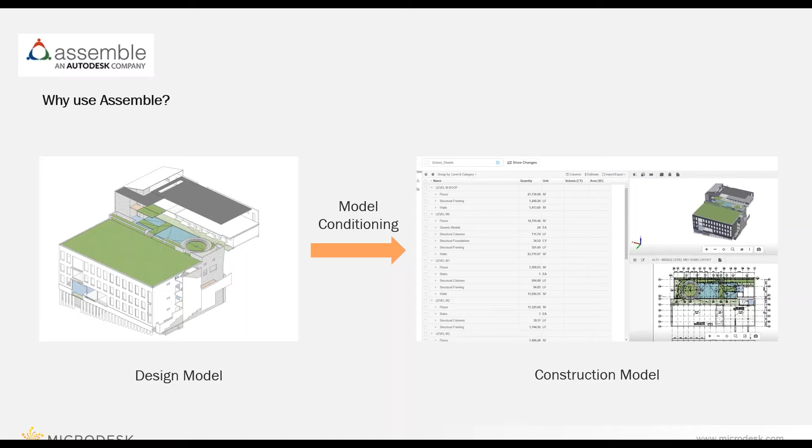Getting to the model on the right usually takes a lot of time and money because design models typically lack that construction-ready data. So out of frustration or distrust, pre-construction teams typically revert back to that traditional method. But unfortunately, those traditional methods can't always keep up with the demands of modern construction. So we must get a mechanism in place to get that design model ready for construction quickly and efficiently, which is what Assemble allows you to do.

Assemble's user interface is fairly simple and pretty intuitive, making it easy for non-BIM users. First, taking a look at this user interface, you have the model tree. This is the navigation tree of all models, categories, families, and types in the project. Then you have the inventory list, which is the schedule of all visible objects in the view. And here is your model viewer, where you can view and navigate the model geometry.

Next, you have the view chooser. You can choose from the drop-down of any of the views that have been saved, or click on the squares icon to get back to the project inventory. Then you have the Show Changes button. This allows you to see changes between model versions with just one click, so you can quickly see what those revisions were between each design iteration.

Next, you have the Selection bar. This allows you to change the visibility of objects, launch the Properties panel, or review quantities. And then there's the Properties panel, which shows you all the properties associated with the item selected in the model viewer.

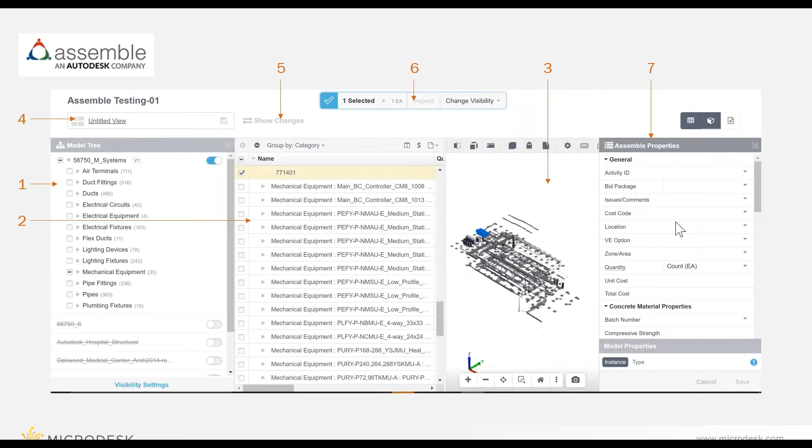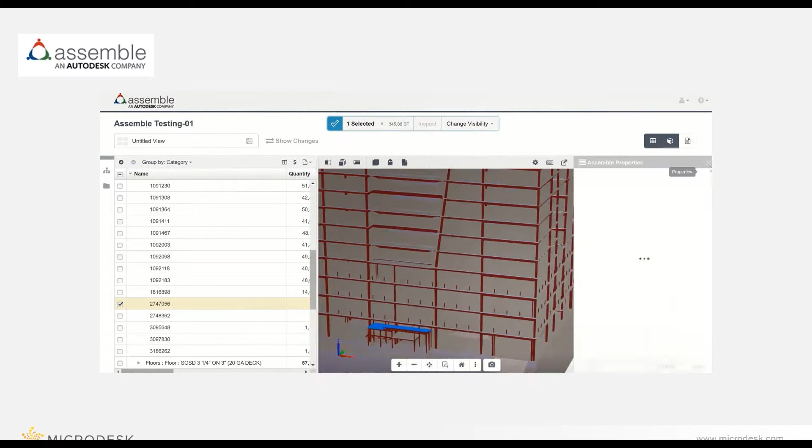So let's jump into Assemble and see how properties can be used to condition the design model. First, we're in the model viewer. We can navigate to an element we want to select, so we'll select the slab on metal deck here. You can see it's selected in the inventory list. We can jump into the properties panel and see all the properties associated with it.

So here you're seeing the Assemble properties — bid package, cost code, right? These can be changed to anything you're trying to track. So we have some install properties in here, and some concrete estimating properties for concrete waste factor, rebar cost, and rebar weight. You can also add custom formulas using the class editor that can be linked to Assemble. It's quick and easy to add information — for the bid package, we're adding concrete and clicking save. That will now be linked to that element from here on out.

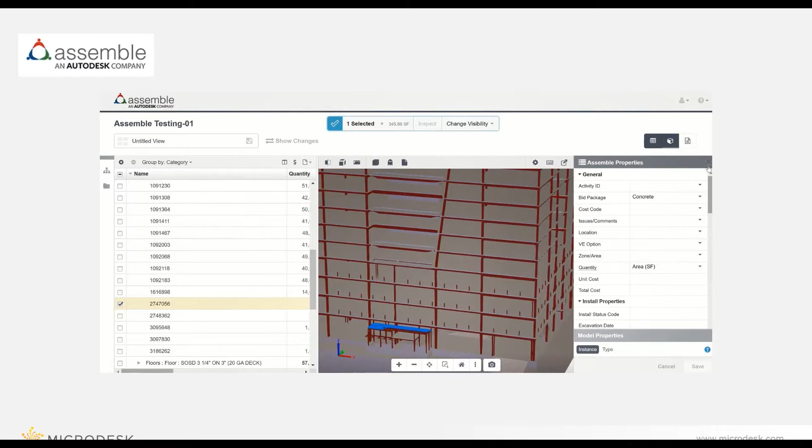Now let's take a look at what it's like to add some custom properties. You go back out into the project inventory, go into Edit Project, and then down to Manage Assemble Properties. In here, we'll see the properties available to us right now — we have general and install properties, and some asset management properties that we have hidden. You can edit, hide, or delete properties in here.

You can also create your own group — so here, we're going to do concrete properties. You have the option of displaying that group for specific categories. If you drill down, you have options like curtain wall, air terminals, ducts — any of the properties associated in your model. But for here, we'll use all categories and click Save.

We want to drag that concrete properties group up because we want it higher on the list when we get into the properties panel. So all you have to do is drag it to the top here. We want it right underneath general. Next, we want those concrete estimating properties up at the next level, so we'll drag those up as well.

You have two options to add properties: either the plus button or create property. We use plus. If you notice, your group is already populated when you use that plus underneath concrete properties. We're creating a property called concrete strength, and then you have to choose your type. You have all these options here: data tree, date and time, area and count, voltage—anything you could think of, you could make the type. For this one, we'll use number. We'll click Save.

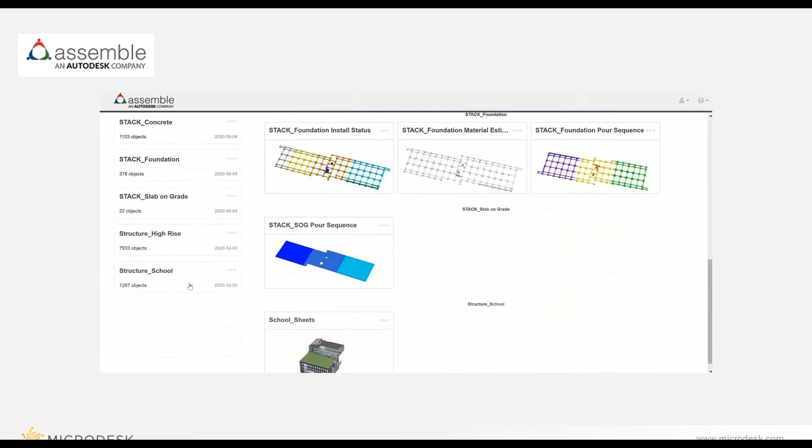Now note, you can add as many properties as you want. You can add as many groups. So whatever you're trying to track in Assemble, whether it be pre-construction or construction, you can add it.

So we'll go back to that same element. We'll go into the properties panel, and we'll add some of the information. So you can see we have that concrete strength and that MasterFormat. We'll jump into the MasterFormat so you can see what it's like to choose from the data tree. As you can see, we have those same levels that we saw on the properties panel.

And you can choose any one of these. We will end up choosing concrete since that's what this falls underneath—that's a slab on metal deck. But again, this can be changed to be whatever your company is using.

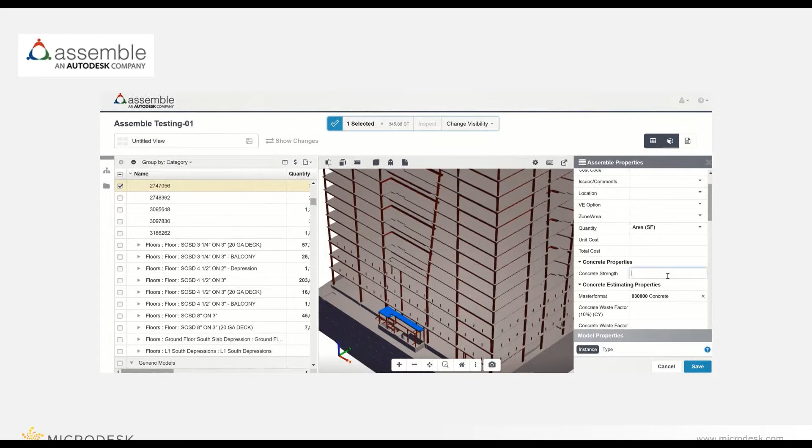Next, we'll add concrete strength. We'll be putting it in as PSI. Note that we did not specify what unit it is, so we'll go back and edit that property just so you can see what it's like to edit it once you already have it established.

So we'll go back to the project inventory, go into Edit Project, go back to Manage Assemble Properties, and we'll click Edit, and we'll add PSI. Note, you're unable to change the type once you create that property. We'll click Close, and now our properties have been added.

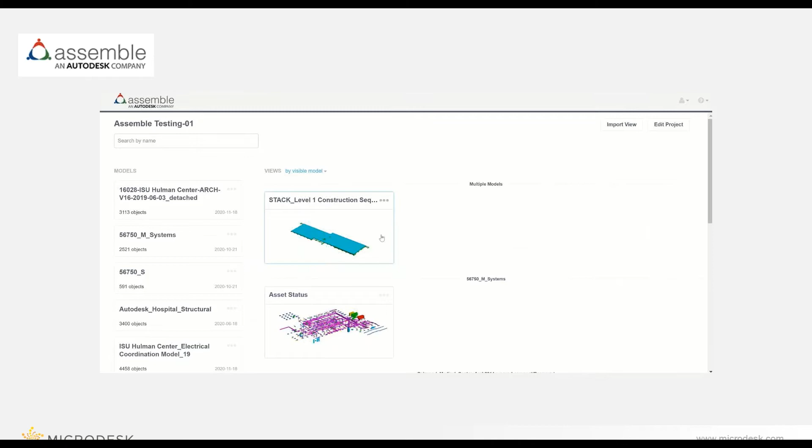Next, we're going to take a look at the inventory list and see how visibility settings can be used to isolate the scope you're trying to quantify.

So we're now in the model. You can see that this is the structure model. We want to isolate the concrete. Right now, we're seeing all the steel and all the other structural elements. So we'll go into the model tree and visibility settings and create a rule.

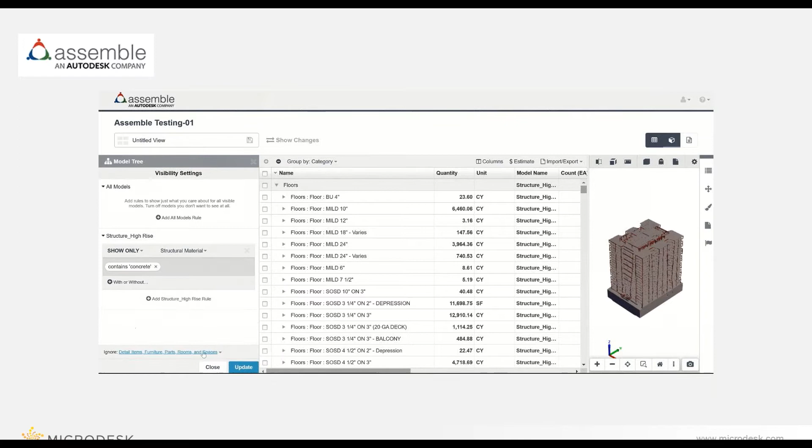We're going to add a rule here. We're going to do a show only. Here you can use whatever property you want to filter by, so we're going to use structural material, and we're going to do a contains concrete rule. And click Update. Now the model viewer only shows the concrete that's on the job, and also the inventory list. So now we have isolated all the concrete on the job.

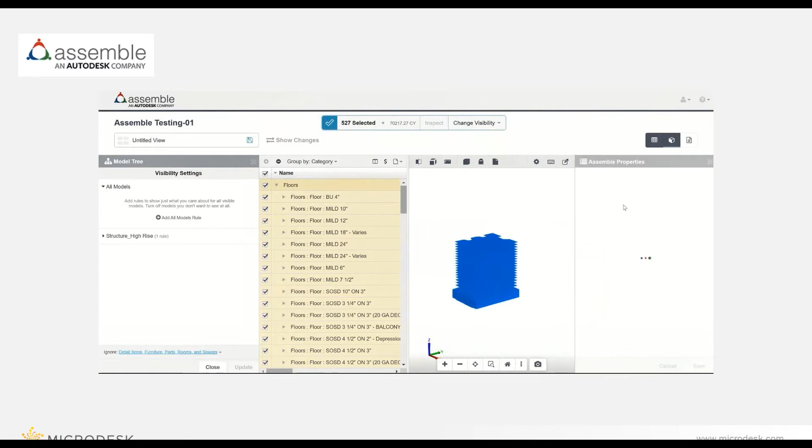Next, we're going to add the bid package here, just so you can see what it's like to add the property to all of these. Since we know this is all concrete, we'll change it to concrete and click Save. Now these all fall underneath the same bid package.

Next, we'll take a look at the inventory list and what it's grouped by. Right now it's grouped by category. So if we drill down, you can see we have all the floors, columns, foundation, framing, right? We have all these other group-bys saved.

So let's just choose, and you can also create new groups. We're going to choose structural material just to make sure our rule is working the way we want it to, and it is. We're seeing concrete buildup, cast in place, some of the balconies, grade 50 for the rebar.

So we're going to create a new group. We're going to do it by concrete strength. You can group by any property available to you in the model, whether it's an Assemble property or a model property.

So we're going to search for concrete strength. Next level, we're going to do category name. Next one, we'll do category type. You can use as many levels to the group by as you want, and then manipulate how they're seen in those groups easily as well. You can see we have a ton of options here. You can drag it up, so type would be above category name, but I like it the way it was.

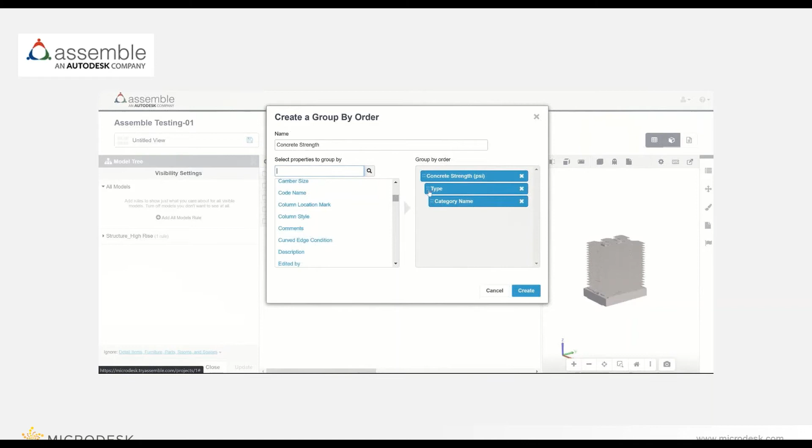So we'll hit create, and then immediately we see the inventory list is changed, grouped by the properties you just selected. So you're seeing the concrete strength, then the category, and then the type. We drill down one more, you can see the families underneath the types. You drill down one more, you can see the source IDs. This allows you to basically group by whatever information you want to see and how you want to see it.

Next, you'll notice we have a ton of information in this inventory list. In the columns, you can manipulate these as well to be exactly what you want. Right now, we have all the model geometry that came straight out of Revit or the authoring software, but we want to add some of the estimating information.

So we're going to pull in unit cost. Note you can pull in any property you want here. We're going to take out some of this information we're not really going to use, so length, width, height, thickness. We are going to use volume and area, and we'll do total cost as well and bring that up.

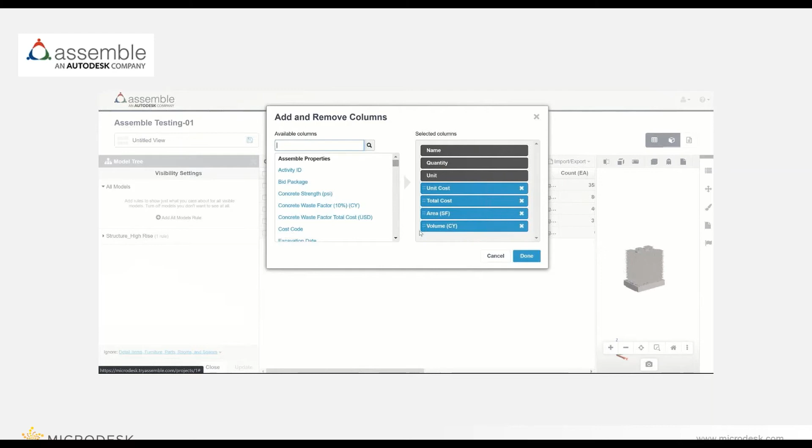Note we already have all the quantities in volume and cubic yardage, and you'll see that in the inventory list. So volume at the end really is unnecessary because it's kind of a duplicate column in this situation, so we're going to take it out.

Done. Now you can see when we drill down, we've got the unit cost for each type and it's calculated, and then you have the total cost, all based off your Revit-based model quantity takeoff. And this is just done immediately.

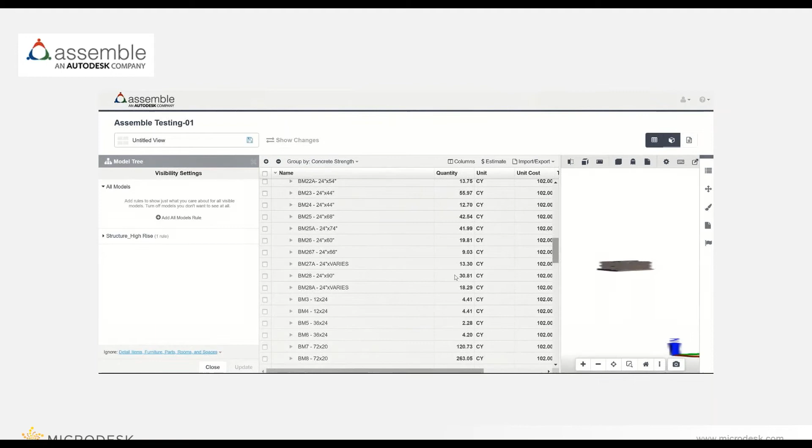As you can see, this can be a huge time saver for your estimators. The process is typically trying to do an on-screen takeoff from 2D drawings, right? We didn't even need to do that. We had the Revit-based quantity takeoff from the model, and now we have the unit cost calculating the total cost for us immediately.

Next, we can come over and color by property. This is a good gut check to make sure that everything makes sense and the quality of your model is correct. You can color by any property. Here we're going to do concrete strength. As you can see, we have all our concrete strengths, and now just immediately put color per the concrete strength.

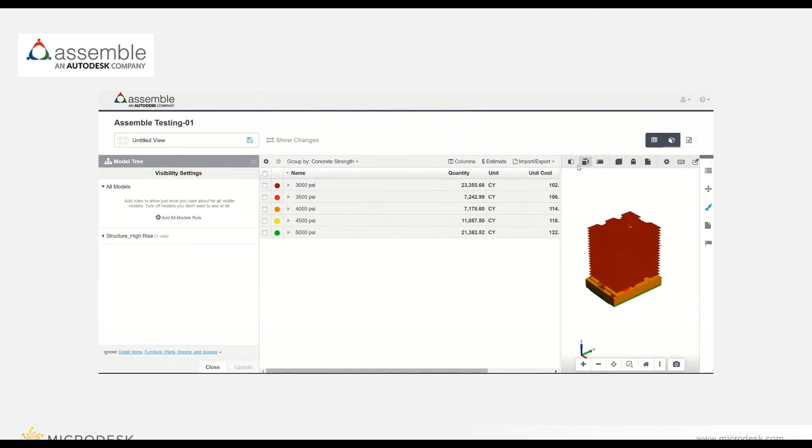You can section to investigate a little bit further. You could also use more rules if you wanted to see this by specific level. You have endless possibilities here. And you can see that in the inventory list, the color is also associated with the colors that you're seeing in the model viewer.

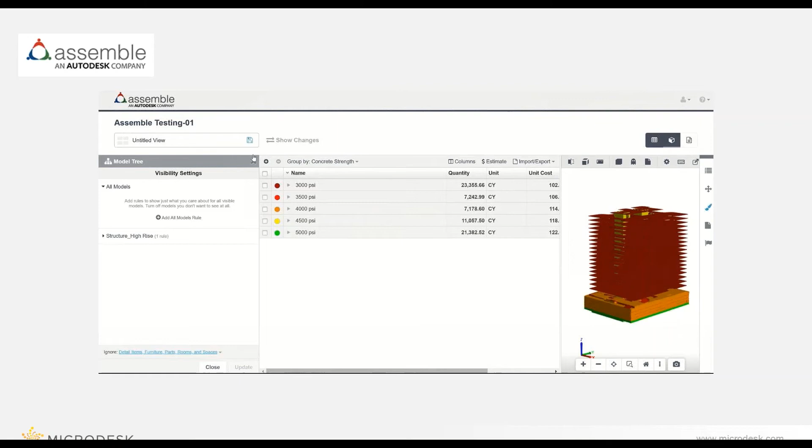Now that we have this view to a point that we like, we're going to save it and do this concrete takeoff. Done. Now we can go back to this view whenever we want to. Your other teammates can jump into it. And now we have a concrete takeoff with all the concrete elements isolated.

Now we'll take a further look into how Assemble can be used to estimate costs by leveraging the Revit-based model quantity takeoff. So now we'll jump back into that view that we just created, concrete takeoff.

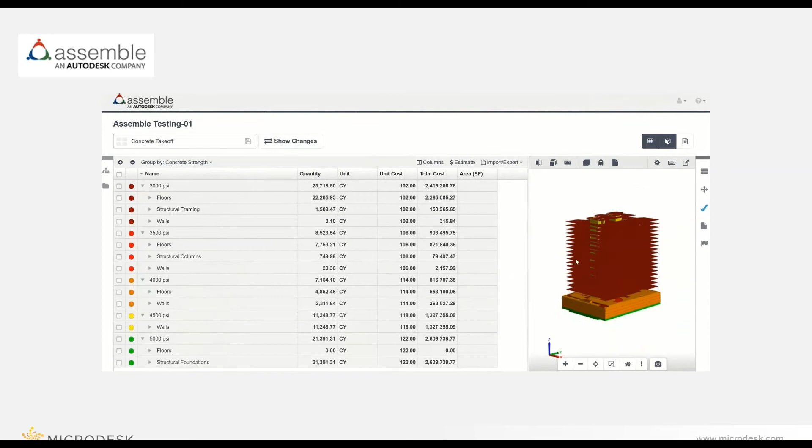Here we'll see that all the color has been saved, the columns have been saved. You've got all the group by saved, right? So this is exactly how we left it.

I want to show you how you can add some information and how that will impact your inventory list. For example, if we knew that this concrete 6-inch wall needed to be changed to a different concrete strength and had a different unit cost, you come into the properties panel. You can change what concrete strength it is. So it's now 3,500 PSI, and the unit cost will change since the concrete strength has changed. We're going to change that to 106.

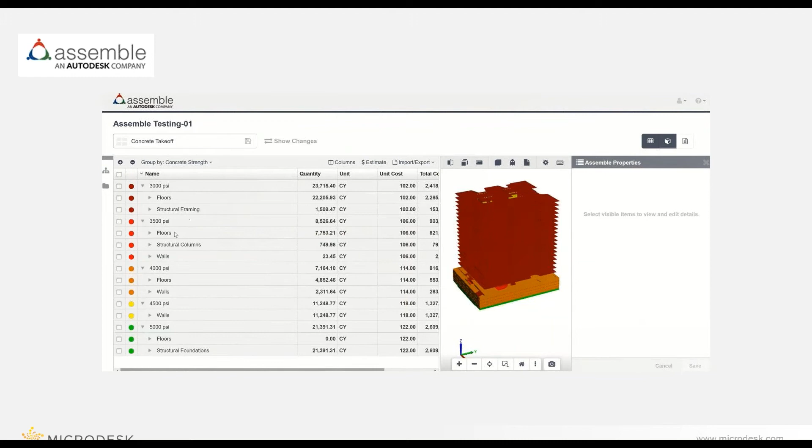As you notice, total cost automatically updates based on the unit cost, and then it's been moved in your inventory list to be grouped underneath the 3,500 PSI. You can also note that the color has changed in the model viewer to reflect that change as well.

Now we're going to use the Show Changes button. This is pretty powerful so we can see the changes between each design iteration. We don't have to go through and hope that the design team clouded everything that they had changed. We can see what's been added, removed, what quantities have been changed, what type and quantities have changed.

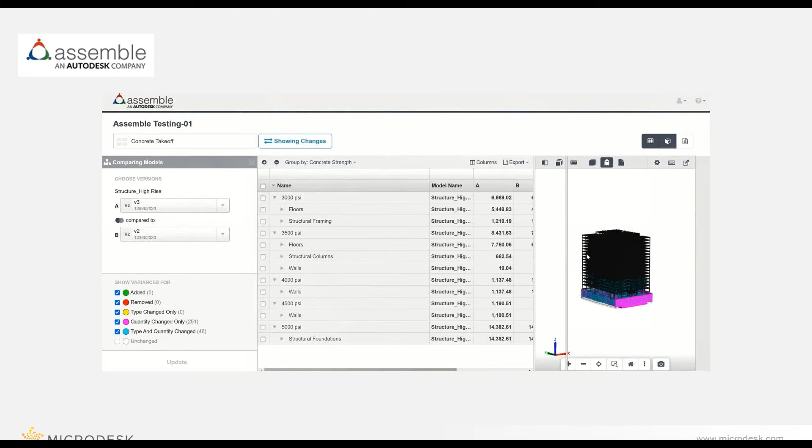As you can see, it's completely isolated in the model viewer to just show what has changed. If we want to show some context, we can use the ghost mode so you can see it where it is in the model, right? And then what's even better is that once you get into your inventory list, you can see what quantities have been added, what has been decreased, so you can see how that impacts your cost.

So we're going to add total cost into the columns that we want to see in this variance report. Click done. And you can see we have model A and B reflect the model versions that are shown in the comparing models window to the left.

And now if we drill over, you can see how these changes impact your cost, right? So we went from having 4.5 inches of concrete on 3 inches of deck to 5.5 inches of concrete on 3 inches of deck. What does that do to our cost, right? Well, it decreased one value by 481,000, but we went up to 545,000. So you can see immediately how that's going to impact your budget.

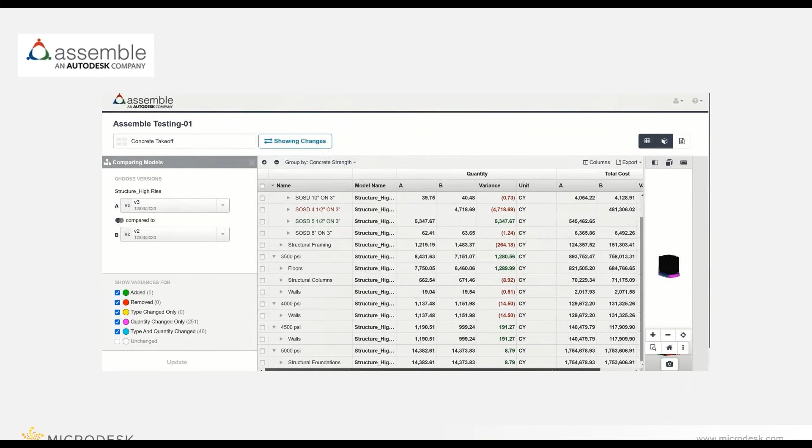You have the information to have educated conversations with your design team and owners as soon as you get that model from your design team. This is typically a pretty tedious process, as you'd have to go through the takeoff again if you were doing it with 2D drawings, and you wouldn't be able to get that information as quickly or easily to have quick conversations with all the stakeholders involved and how it impacts them.

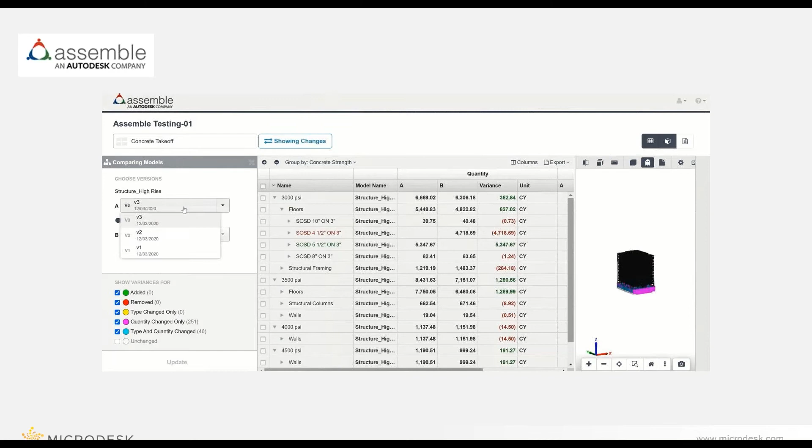Next, you have the option to change what model version you want to look at and what you want to compare it to. So if you had a 50% production to your construction documents, or if you wanted to compare CDs to SDs, right, here, as many versions as you have, you can compare them.

You can also isolate and hide by quantity changed only or type and quantity changed only, right, what's been added or removed. So it really allows you to isolate that information.

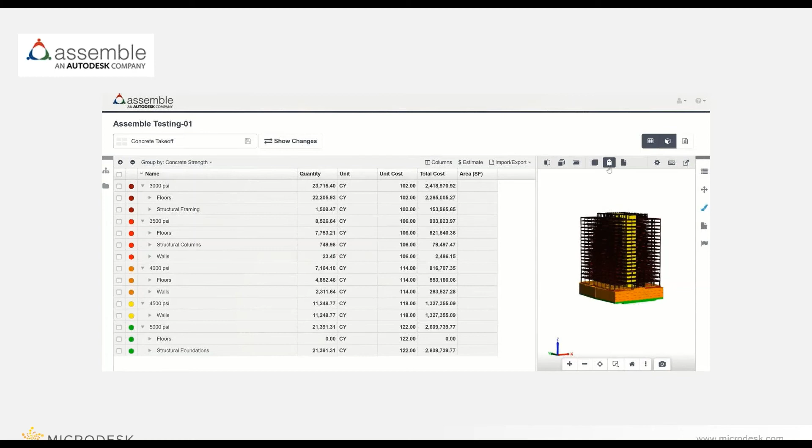So we'll go back to just the regular view that we had, and you can see we have all the information set up the way we want it. So you can export to Excel now that you have all the data set up the way your pre-construction team wants to assess it.

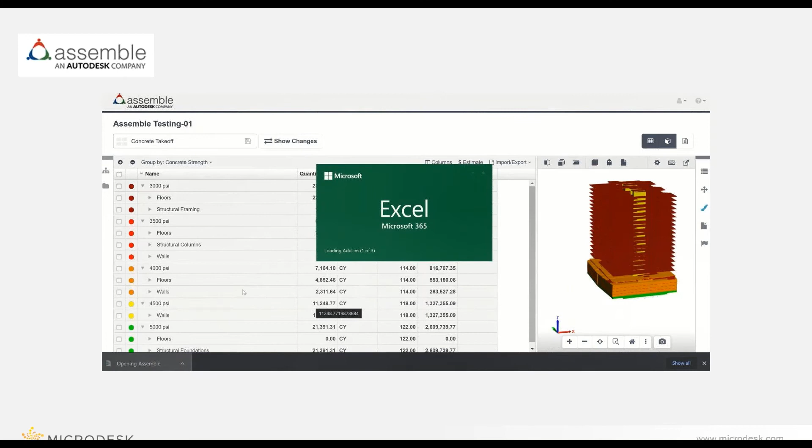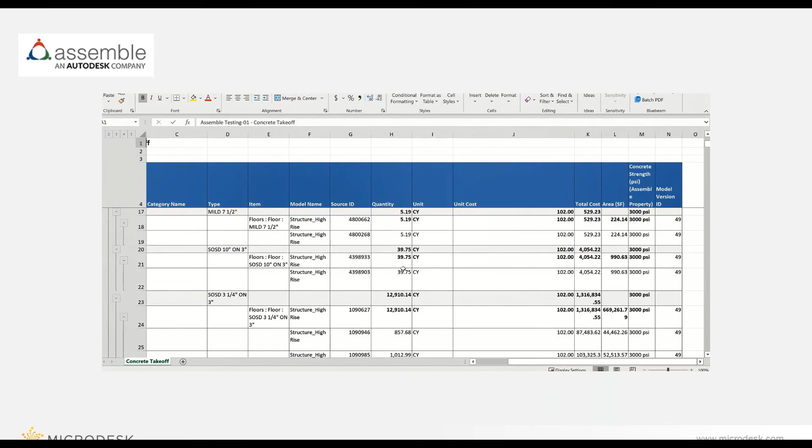So now you can open up Excel, you can see the workbook here. And you're able to see that this is set up the same way that Assemble had it set up, right? All the same information, unit cost, total cost, but this information's stagnant, right? Which is fine, it just captures the picture in time.

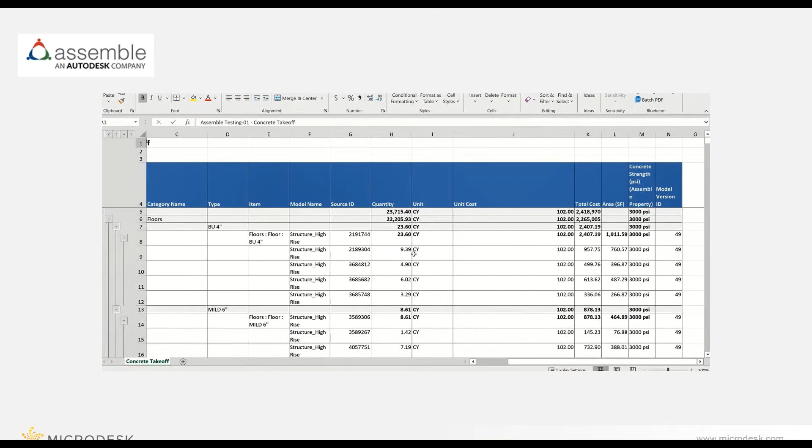And although that's great right now, we all know that there are design changes that happen all the time. Or if we were to add different properties to Assemble and they were to change the unit cost or the concrete strength or any of the other properties that you are pulling and exporting to the Excel spreadsheet. So although this is helpful, there's an Excel and Assemble integration that allows you to basically connect those two platforms and have a live connection.

So we're going to take a look at that next.

So now we're in Excel. There's an Assemble add-in that you can download. You need to locate the connection and then configure it. So you connect to your site, pick the project, and either pick a view or model. Here we're going to pick a view, click that concrete takeoff view, and click your version. This is a view, it's NA.

Now that you've configured your connection, you need to set your headers. So here's your report headers. Now we're going to do some configuring of the column mapping. Your first column you choose, you really need to make it your key. This is going to be how we pull the rest of the information. Use the assemble connection, and we're going to use source ID. We're going to do apply and save.

The same process, except we're going to use the data connection for the column key. Here we're going to do structural material. We'll drill down and find structural material. Note, this seems a little tedious, but once this Excel spreadsheet is set up once, it does not have to be done again. All you have to do is run the report and you get the live information straight into your Excel spreadsheet.

You can pull whatever data you want and whatever category you want, property as well. So here we're going to map category name, apply column mapping, and save. Next, we're going to do type. Drill down to type and map that column.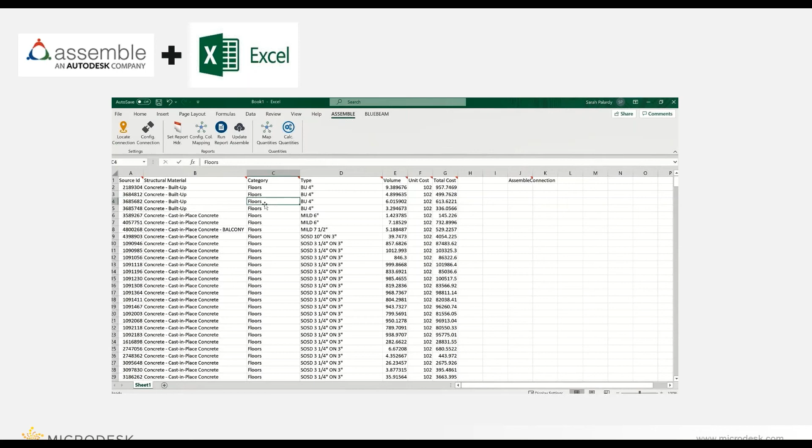So here is how you would basically pull columns and map those columns. But sometimes your teams are going to have pre-established spreadsheets and workbooks that they are already using for their estimates, and they're going to want to be able to just pull the quantities that you're creating in Assemble. So there's another tool within the Assemble tab called Map Quantities, and we'll take a look at that next.

So here we're going to show, we have a spreadsheet that I created. This could basically be any spreadsheet that you have with your team. If your pre-construction team has a workbook with 50 sheets, all you have to do is make sure that you have the Assemble connection in one of the sheets. So same process as before, you're going to locate the connection and configure it. We're going to connect, pick the project, view or model, and what version, then click OK.

Next, we'll see that we're looking strictly at the slab on metal decks, and we're going to try to map some of these quantities. These quantities have already been mapped just for time-saving purposes, but here we'll do quantity, picking the quantity property you're looking for. Here we're looking for volume. Next, you're going to do the filter by property. We're going to pick type, so we can drill down into the type we want. We're picking the slab on metal deck that matches what we're looking for, then clicking OK and save.

And here we'll do calc quantities, and now these quantities for the volume for all of these slab on metal decks have been pulled straight out of Assemble, so it did not need to be done in a 2D setting. This is now in the workbook that you had already created and established. And note, you might have unit costs that you didn't want to put in by hand that you already have in your Excel spreadsheet.

So this is where we're going to show how you can push things back into Assemble. We're going back to configuring column mapping. We're going to use type as the column key, column type. We'll do that Assemble connection as type. Then apply and save.

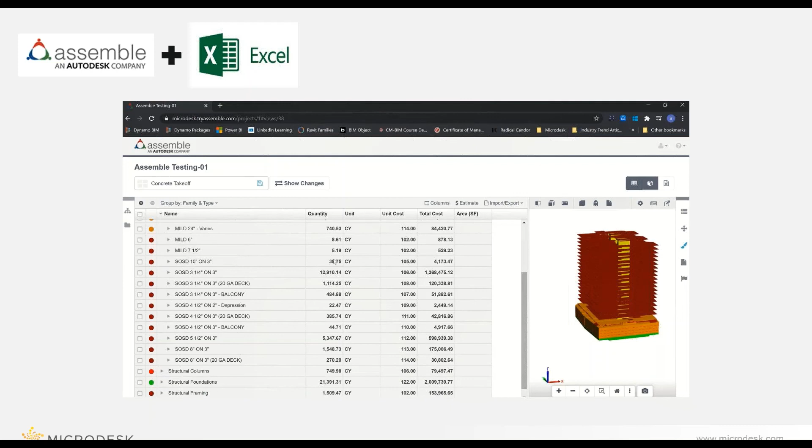So to go over some benefits of using Assemble, just to wrap this all into a big bow here—the key things I think are most important are, first, the collaboration across the entire project team in a cloud-based environment. This is huge.

Teams work in siloed little places, right? Some people are on the network, some people have Excel spreadsheets they're using to do their scope. In this situation, everyone can look into each scope that's being estimated in Assemble, and you can see the information and the views that you're creating, so we can basically collaborate across teams.

Next, this is big for all the construction workflows you can use Assemble for. The inputs can be made in the field on a mobile device without Wi-Fi. So you can basically take the model off the Wi-Fi and input, say, install status, or note any issues that your superintendents and foremen run into out in the field when there's spotty Wi-Fi or none at all.

And they can come back to the trailer, link into the Wi-Fi, and all that information goes back up to the cloud. That allows your people in the office to see all that information and have a better connection on what's going on in the field.

Next, it can be easily customizable to fit any company's workflows. We showed you how you can customize the properties, customize your group by, and pull the information into your own Excel spreadsheets to meet your current workflows.